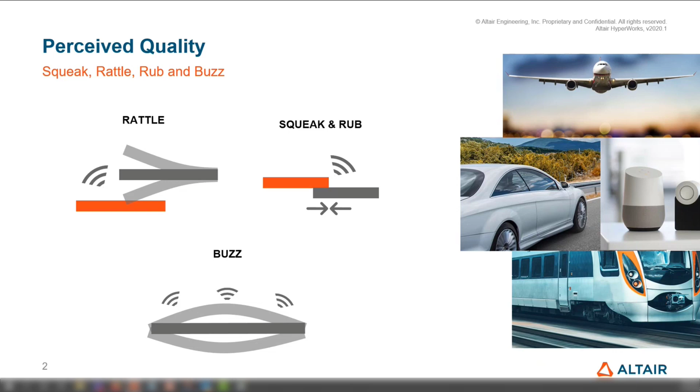Traditionally, these issues are fixed based on iterative physical testing, which is often done at later phases of the product development. And as you can imagine, it ends up in very expensive reworks and quick fixes at the production stage. Through simulation, we can eliminate most of these issues even before the first prototype is built. Altair's solution for this is well established and has over the years become industry standard for Squeak and Rattle simulation.

So Squeak and Rattle issues are, as we've seen, a responsibility of many at every stage of the vehicle development cycle or product development, even at the early design stage. So here we provide the tools and technology for the first stakeholders, designers, allowing them to evaluate the risks very quickly and iteratively. And this is achieved using CAD-based simulation combined with material compatibility analysis using the Ziegler stick-slip material database, which I'll get to a little bit more later in the presentation.

As soon as the first finite element model is available, we can then add on and perform a structural squeak and rattle risk analysis, which allows us to identify the issues utilizing solutions like SnRD, which is leveraging the industry standard E-line method. Here, we also leverage structural optimization in different ways throughout the entire development process to guide us in the right direction on how to actually solve the issues that we find.

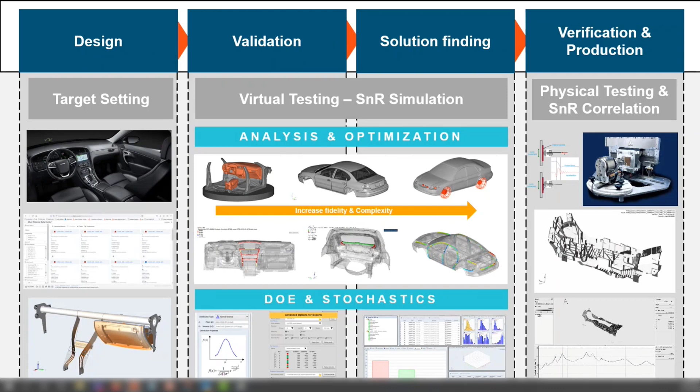One can also include variabilities in the model through a DOE and stochastic study, and this allows us to examine how the squeak and rattle risk will directly be affected by variations caused by manufacturing, external effects, or wear. One can also correlate with tests with the main purpose to improve the quality of the virtual testing. Our solution is mainly about providing the simulation tools, but we can also at this stage help out with physical testing through our partners, which we've done in many projects.

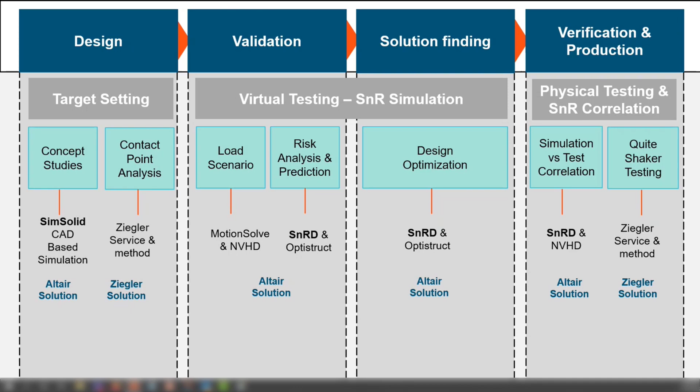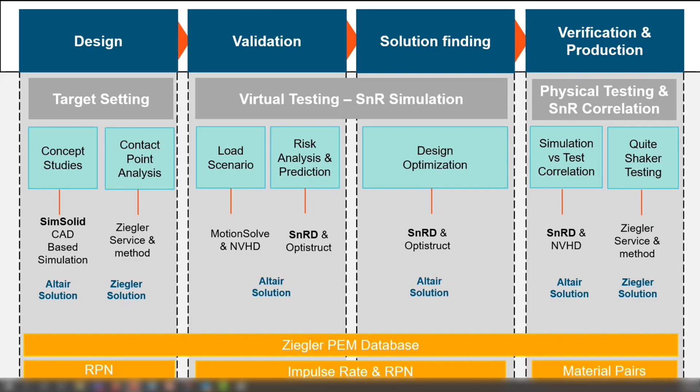So if you look at that entire solution, it's actually not only Squeak and Rattle Director. It's built up of various Altair applications, including our partner Ziegler's methods. But key components of it are, of course, the Squeak and Rattle Director, which we're here for today, and the Ziegler PEM or Ziegler stick-slip database, which is leveraged in different ways across all of the vehicle development process here, as you can see.

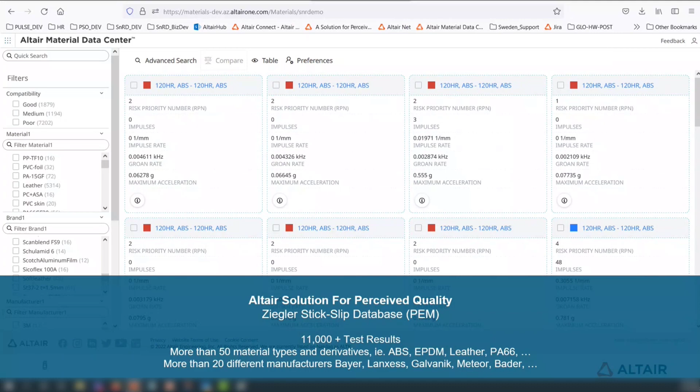So the Ziegler material database provides over 11,000 test results from stick-slip tests performed by Ziegler instruments. And with this data, one can easily compare and assess the compatibility of different materials through metrics such as the risk priority number and impulse rate. And it is now available at Altair Material Data Center, which I'll get to later. We also have a direct integration of this database inside of Squeak and Rattle Director, as we need the impulse rate of a material pair, as we use that as a criteria to evaluate the squeak risks.

And the Squeak and Rattle Director, for those of you who don't know, provides a streamlined, intuitive workflow to perform a Squeak and Rattle risk assessment, as well as providing more advanced diagnosis tools, which makes it easy to identify the root causes of the issues, as well as finding more optimal solutions to actually eliminate them.

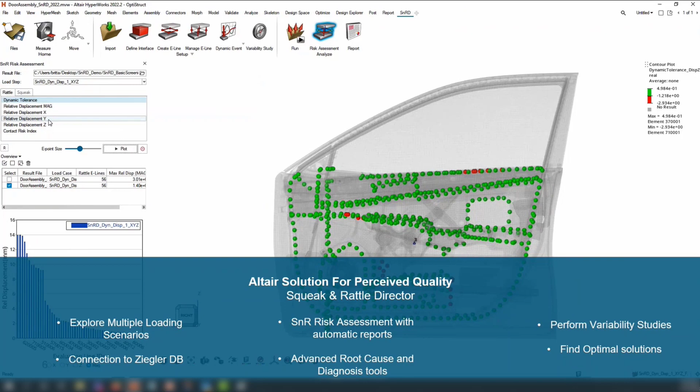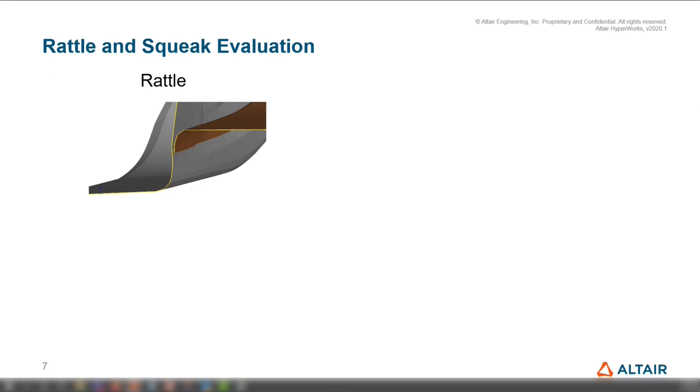But how does it work? What technologies do we use in Squeak and Rattle Director? To detect both rattle and squeak, to make it very simple, we actually track the relative displacement in all directions between two components. For rattle, we keep track of the movement in the gap direction, and we compare that movement with the nominal gap, which we extract from the drawings and the GD&T data. If the relative displacement is higher than the gap, then we know we have a risk,

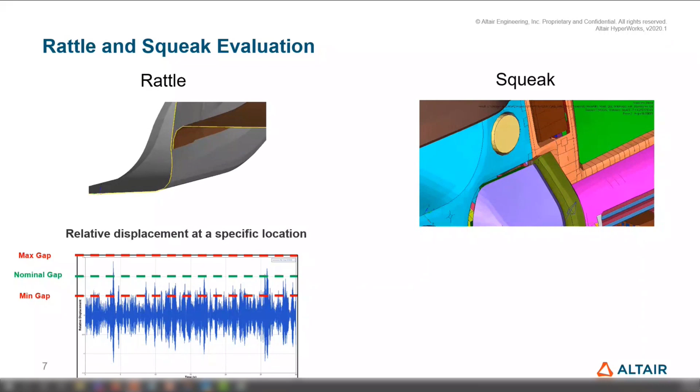as you can see here. A squeak is an issue caused by friction. So here we track the movement in the contact plane, and the risk is evaluated based on the frictional parameters of the interface. And this is where you can use the Ziegler stick-slip database.

So now that we know what it is, how do we access it? Since 2021, Squeak and Rattle Director has been integrated in HyperWorks, so no separate installer is needed. The Squeak and Rattle Director tab is disabled by default, so to access it, you just enable the ribbon tab through the View dropdown. An additional license will be drawn when the SnRD ribbon is visualized and active. So it draws an additional 19 units.

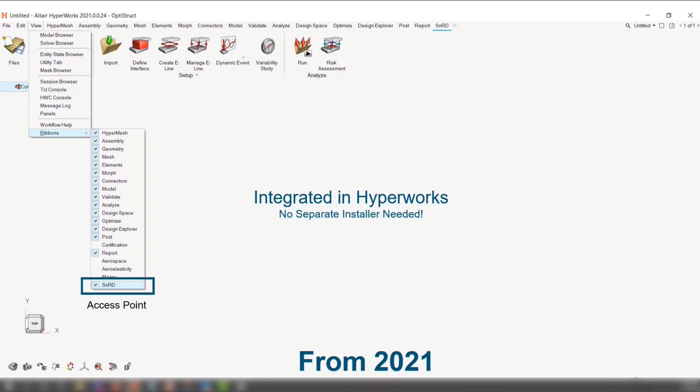And the more advanced post-processing and diagnosis capabilities that I mentioned can also be accessed. To access these, you need to load them through a sessions file. And we are working on making this more easily accessible too. So now over to the main event, which is the highlights for the latest 2022 release.

I'll start with the most major one, I would say. There has been a drastic need to improve performance of the creation of the E-lines that allow us to track the relative displacement, and this was especially true for large models. We've also gotten many requests to give more control over the actual realization of the E-lines to ensure that E-lines are created properly in all areas of interest. Previously, as an example, when an E-line failed, one could not really see why it failed, and one could also not find a solution for it.

So here we leveraged core connector control functionality, which has allowed us to drastically improve the performance. For this example, a 5 times speed up, or even more sometimes. But it's also made the creation much more robust. And the workflow, as you can see, has not changed much, but one can easily access the connector controls and modify the E-lines to ensure you get the behavior that you're after.

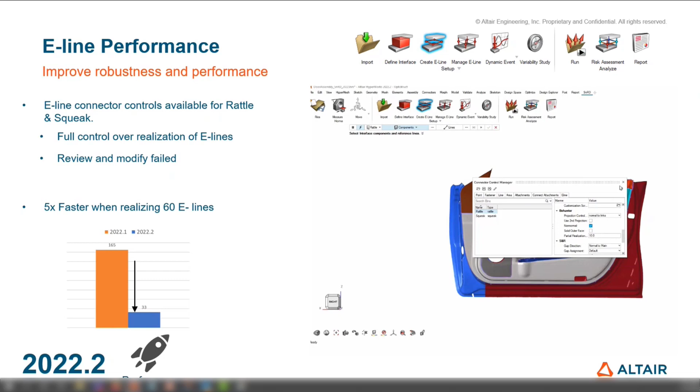Right, guys? So we've also made some changes to the risk assessment, which now allows you to review the results directly on the model in HyperMesh. This removes a few steps which are sometimes very time consuming, like having to reload the model. And it also enables you to modify the model directly based on the results.

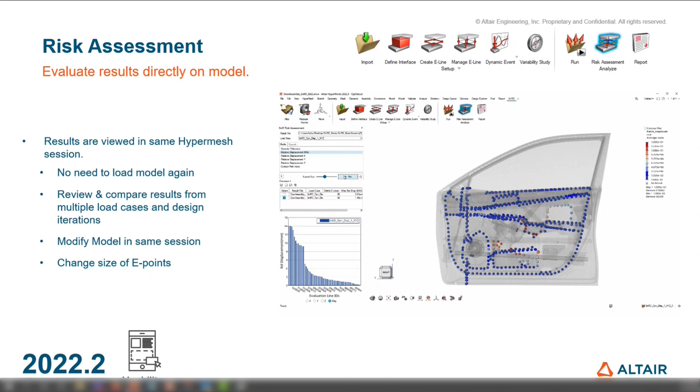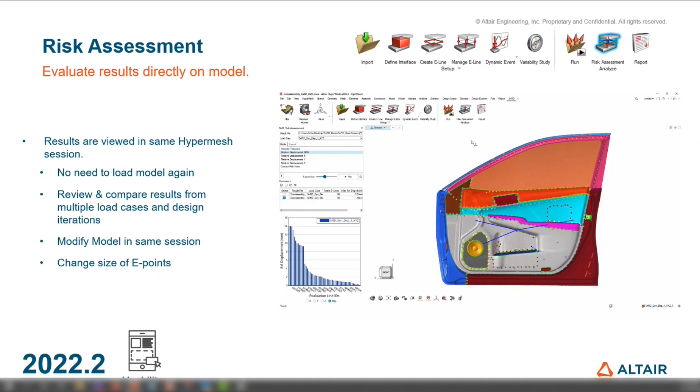One can still review and compare results from multiple load cases, as you can see here. But once you're done with your result evaluation, you just turn off the results so you can continue modifying the model. No need to work in different sessions as previously. Oh yes, and we have also made it more streamlined to change the size of the E-points, which has also been a big request.

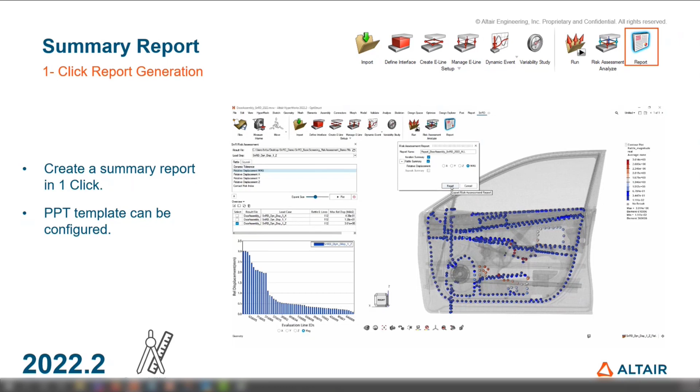So once you've reviewed your results in the risk assessment, you can now create a summary report in PowerPoint, which gives you an overview of all the results and all load cases that you have active in the session in just a single click. Both the contents of the report and the template used to create the report can be configured.

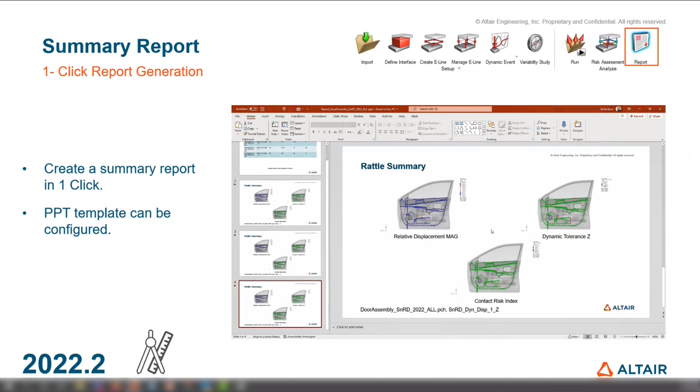And some very big news, which I did previously mention, is that we have now fully migrated the Ziegler database to Altair Material Data Center, making it fully accessible in the cloud. This new interface offers much more flexibility, as one can now filter and sort on all available parameters, something which has been requested by most users. It lets you perform the compatibility analysis much more easily. So let's take a closer look at how this works.

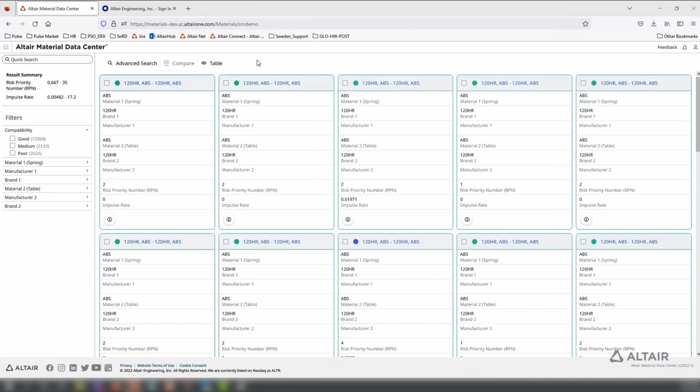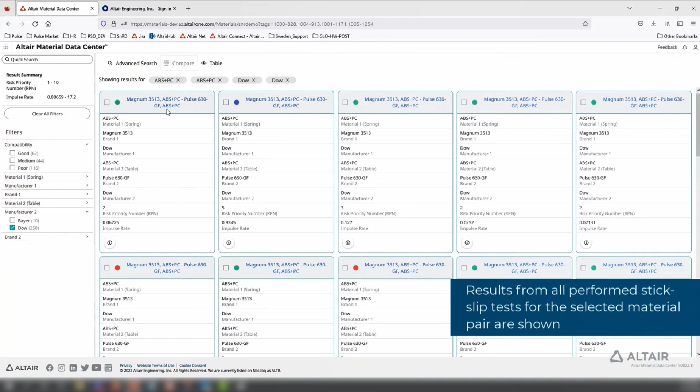So the database contains those 11,000 stick slip tests, as I mentioned. So you start by selecting the materials that you want to include in your compatibility analysis. And you can see that you can select material, manufacturer, and brand here. And when you're selecting, obviously, it's filtered based on your selection.

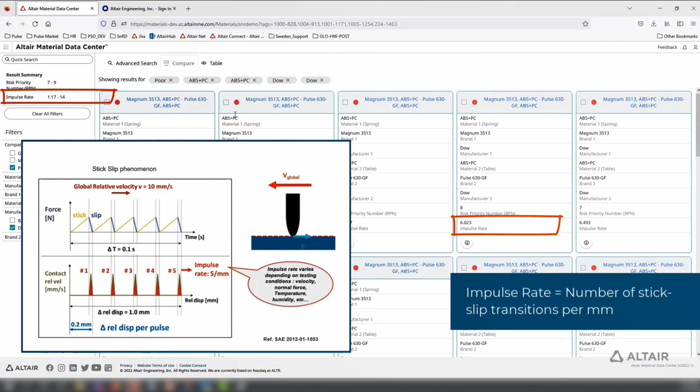And the risk priority number is a criteria to show which material pairs show a high risk for Squeak for that specific test. So you can filter based off of this number to get an idea of how many tests are actually high risk. And you can also look at the impulse rate, which gives you the number of stick slip transitions per millimeter, which is something that we use directly in our Squeak and Rattle simulations.

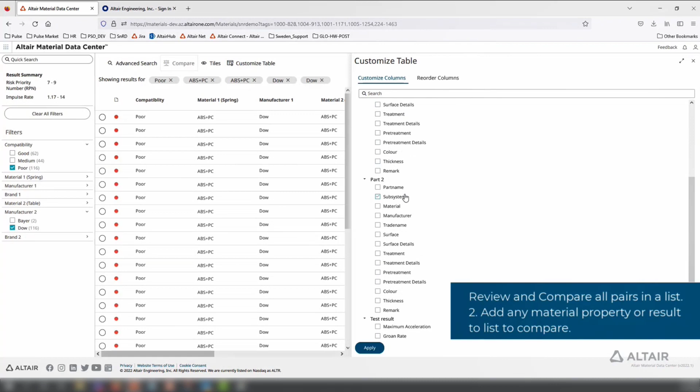And if you want more detailed information on every single test, what all the circumstances were and all the parameters, you have that available too. And reviewing all the material pairs, the list is customizable, which makes it very flexible, and you can compare based off of all available parameters, and obviously sort on them too, if that's required.

So like I mentioned, this is now available on Altair Material Data Center. There is or will be an entry point from the starting page, and you will need AMDC licenses or full access to AMDC to be able to access this.

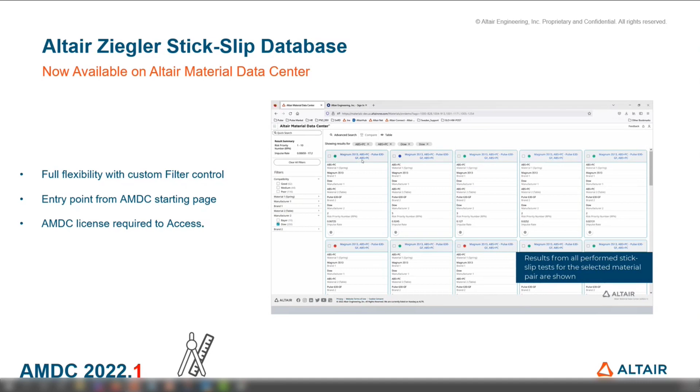Another very big exciting news is that we now have basically the first step towards being able to do CAD based Squeak and Rattle prevention. SimSolid have introduced a new tool in the post-processing, which allows for tracking of relative displacement between two parts at multiple locations. As of now, it only supports linear static, which allows you to evaluate load cases such as quality feel or leaning against headrest. But the plan is also to support modal transient load cases in the future. So let's take a look at this tool too.

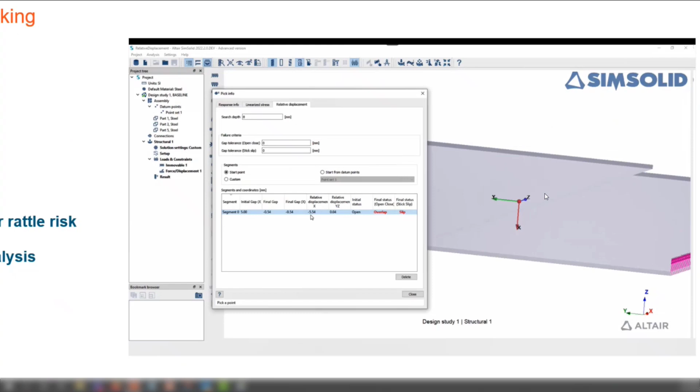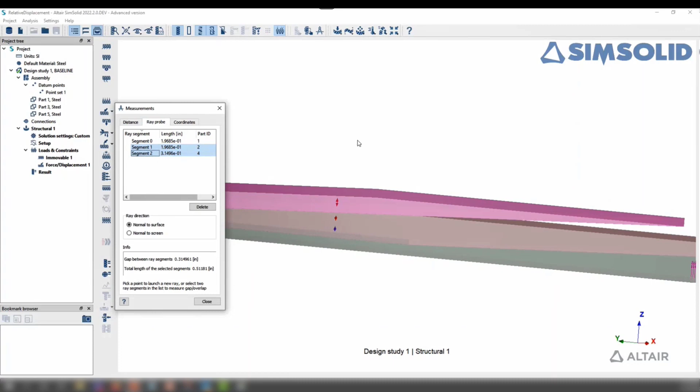So this simple model that you can see here, let's just review it first. It's being pulled up in the positive directions. Basically, all of these parts are being pulled apart. The plates, as you can see, are separated with an initial gap, which is automatically extracted from the model, which is one of the main benefits of working directly on CAD instead of FE.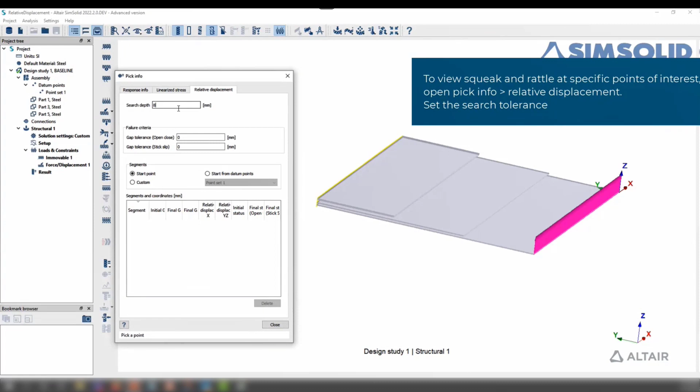After reviewing the static analysis result here, we want to see which potential areas now show a risk for Squeak and Rattle. So we go to the pick info and the relative displacement tab. So this is the new tab. And here you can pick any point to see the final status of it. So it allows you to see the relative displacement in the gap direction, as well as in the plane. But it also lets you see if the relative displacement caused the gap to close or not.

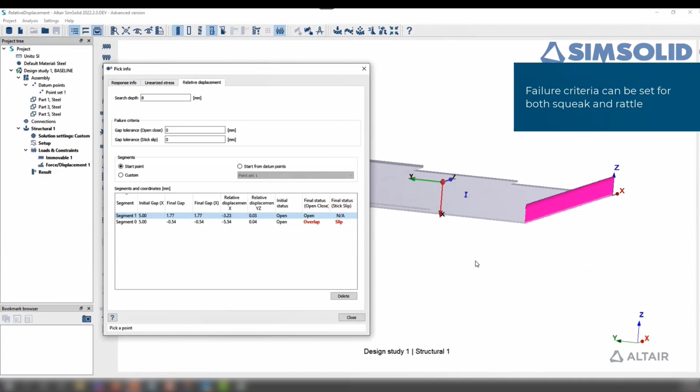So you can see final status, open, close, overlap there. And you can also see if it actually showed a risk for Rattle or Squeak here. And these evaluation criteria that you can see, the final status of open, close, or stick slip, are all based on the failure criteria, which you can modify.

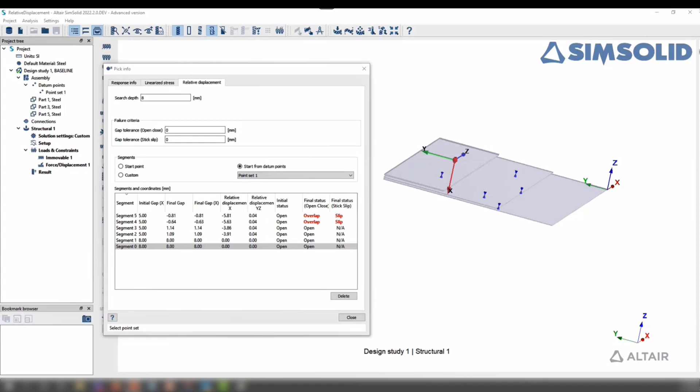So points of interest can be selected manually or directly from these predefined datum points. And these datum points can easily be imported from a CSV file, so in bulk, if you already have coordinates of all the areas that you want to investigate. So with that, there we go. So with that, I conclude all of these brand new features and functionalities.

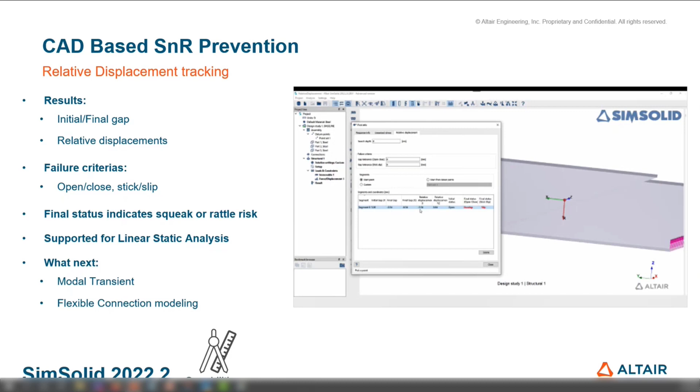And just to finish off, for everyone who is already working with Squeak and Rattle Director, I highly motivate you now to move over to this latest release, mainly because of the major performance improvements that we've done. It's going to save you a lot of time.